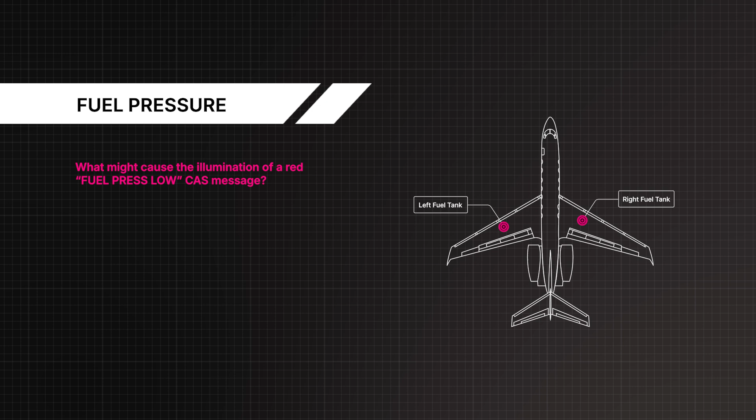Let's begin. What might cause the illumination of a red fuel press low CAS message? Both fuel boost pumps for that engine switched off with the crossflow closed, fuel pressure at the inlet side of the high-pressure fuel pump less than 15 psi, or a fuel leak.

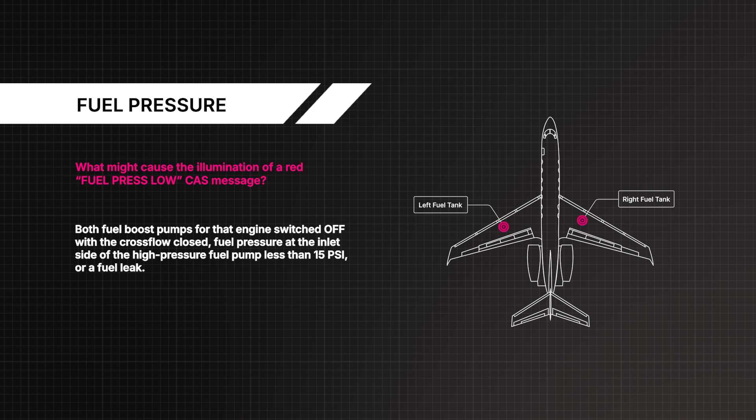How is a fuel imbalance corrected using the crossflow valve? By opening the crossflow valve and turning off the fuel pumps on the light wing.

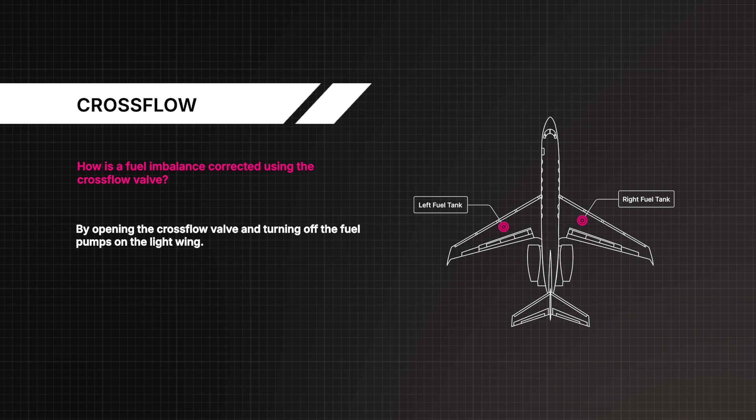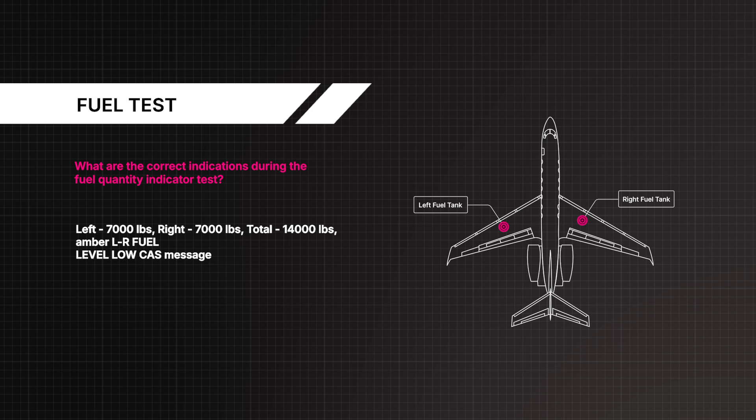What are the correct indications during the fuel quantity indicator test? Left, 7,000 pounds, right, 7,000 pounds, total, 14,000 pounds, amber left and right fuel level low CAS message.

Where is the fuel hopper located? In the inboard portion of each wing tank.

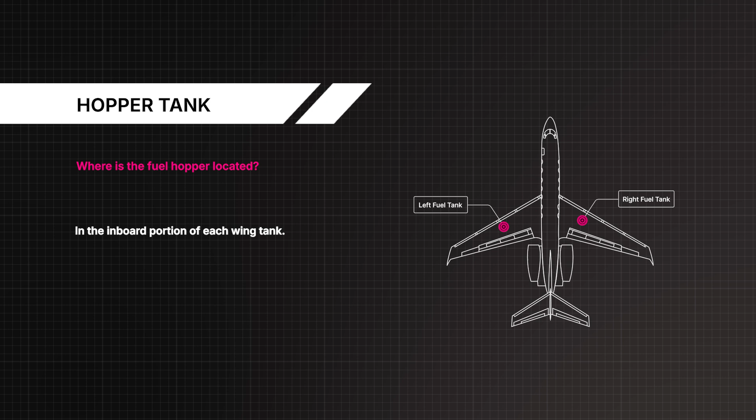Fuel low level warning is provided by low level sensors, which are installed where in the wing? In the fuel hopper tank.

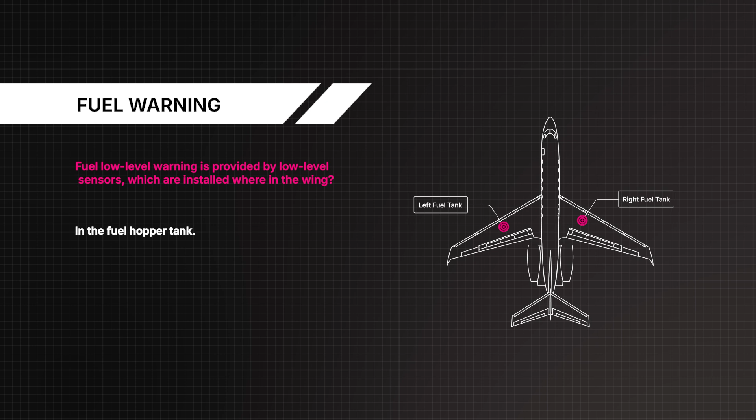Where are the electric fuel boost pumps located? In the main wheel well.

What is the function of the pressure fueling static port located under each wing? It provides a reference pressure to prevent overpressurization of the wing during fueling operations.

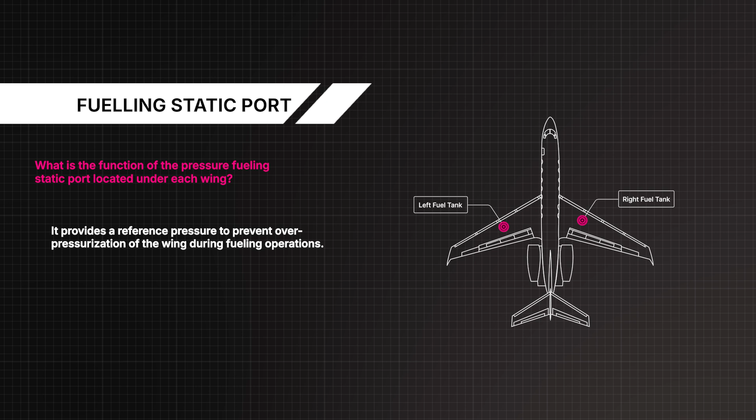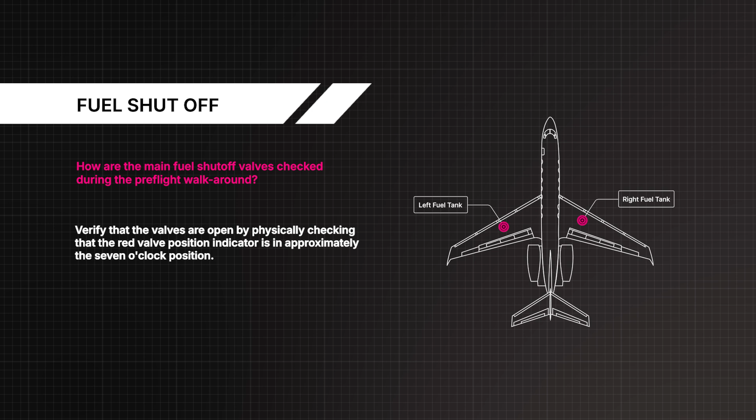How are the main fuel shutoff valves checked during the pre-flight walkaround? Verify that the valves are open by physically checking that the red valve position indicator is in approximately the 7 o'clock position.

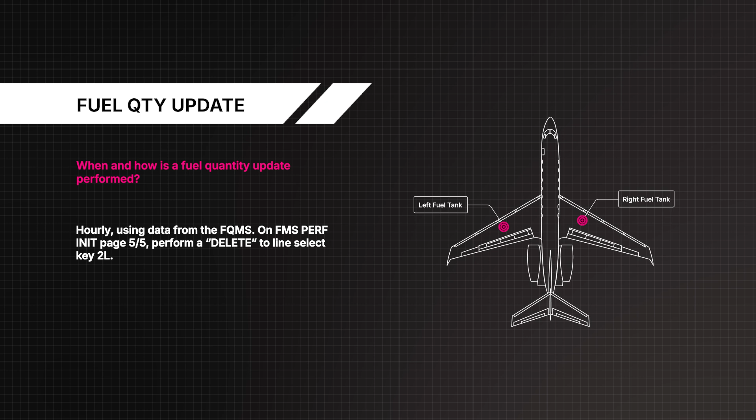When and how is a fuel quantity update performed? Hourly, using data from the FQMS. On FMS Performance Init page 5 of 5, perform a delete to line select key 2 left.

What are the electrical power sources of the fuel boost pumps? Left and right main essential DC bus, left and right alternate right main DC bus.

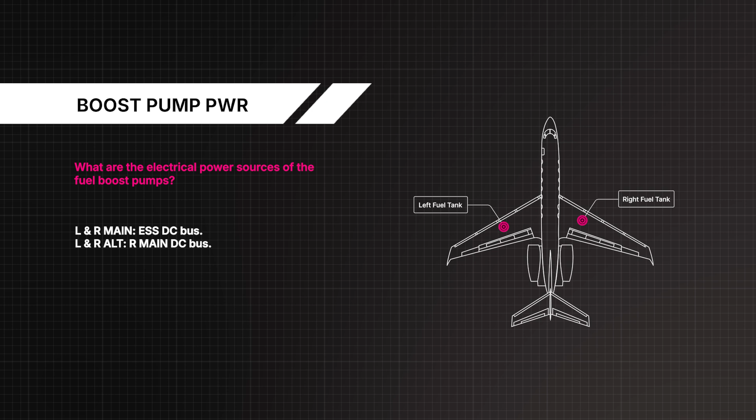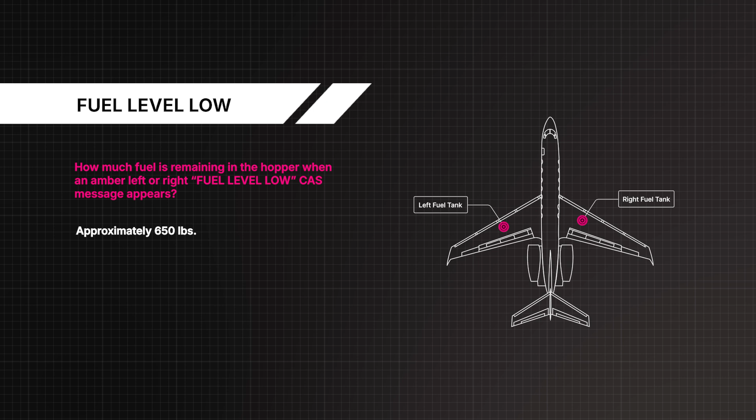How much fuel is remaining in the hopper when an amber left or right fuel level low CAS message appears? Approximately 650 pounds.

What is the capacity of each fuel hopper tank? 190 gallons.

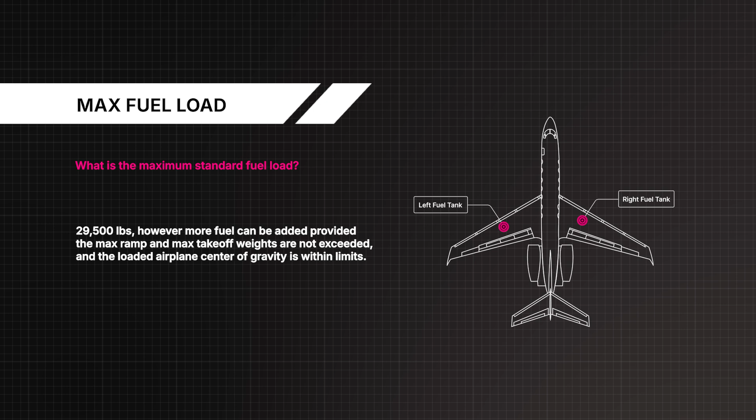What is the maximum standard fuel load? 29,500 pounds. However, more fuel can be added provided the max ramp and max takeoff weights are not exceeded and the loaded airplane centre of gravity is within limits.

What is the maximum fuel imbalance? Varies with aircraft weight. Reference chart in the QRH, section EF.

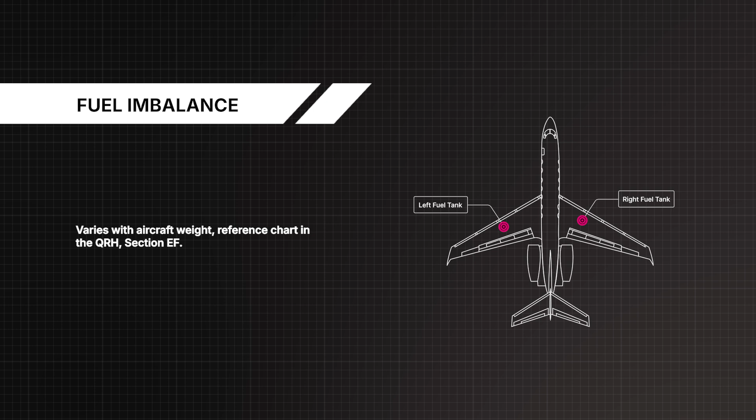If a main fuel boost pump should fail, will the alternate fuel boost pump automatically turn on if selected off? Yes, there is a boost pump auto-change feature.

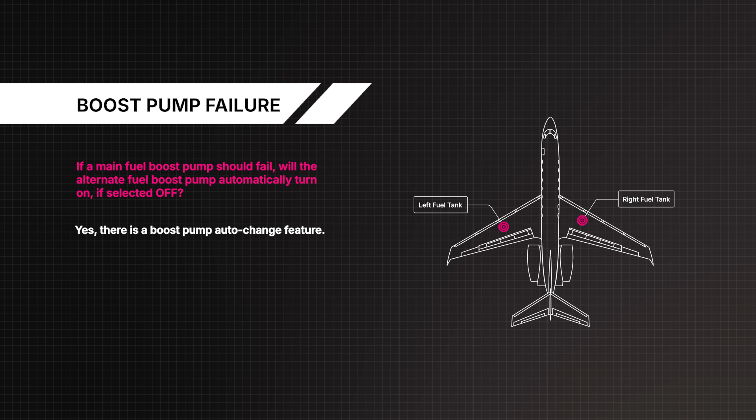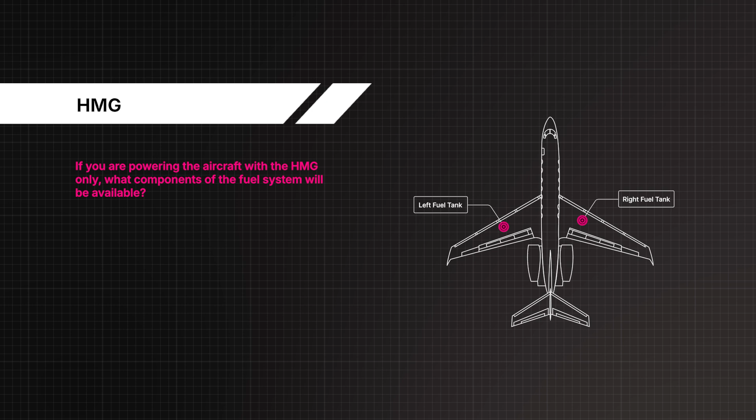If you are powering the aircraft with the HMG only, what components of the fuel system will be available? Left and right main boost pumps, crossflow and intertank valve.

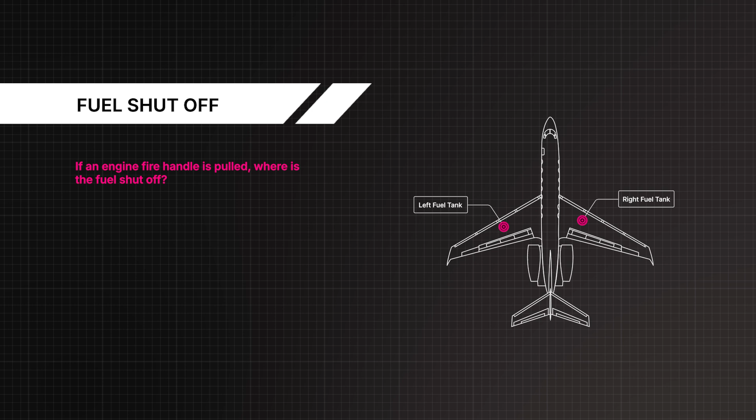If an engine fire handle is pulled, where is the fuel shut off? At the boost pumps in the main wheel well.

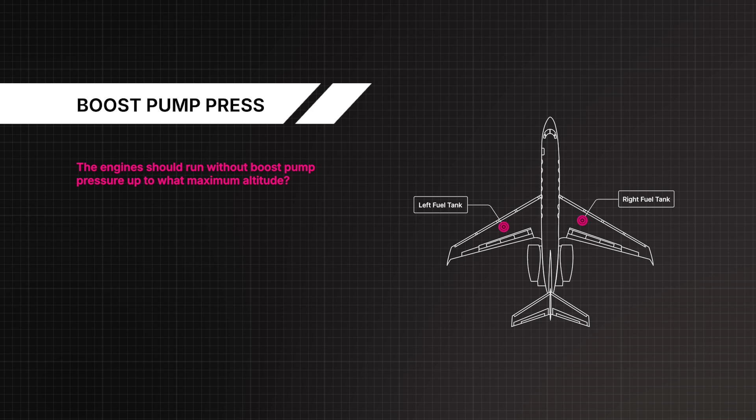The engines should run without boost pump pressure up to what maximum altitude? 20,000 feet. If two boost pumps fail on the same side, how would you keep the fuel balanced? By opening the intertank valve and using a side slip, nose of the airplane toward the heavy wing.

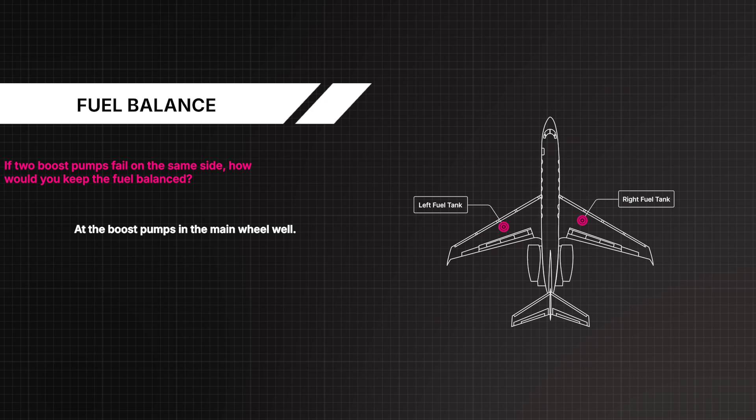How are the hopper tanks kept full? By the use of flapper valves and ejector pumps.

Where can fuel quantity indications be read? On DU Number 3 engine instruments display, on the standby fuel quantity indicator, and on the fuel synoptic page.

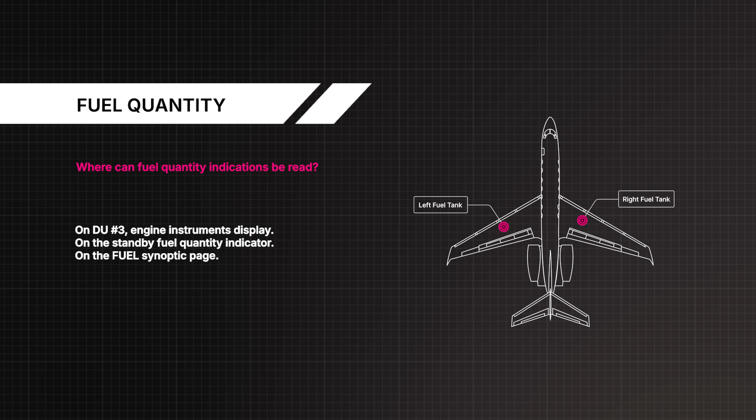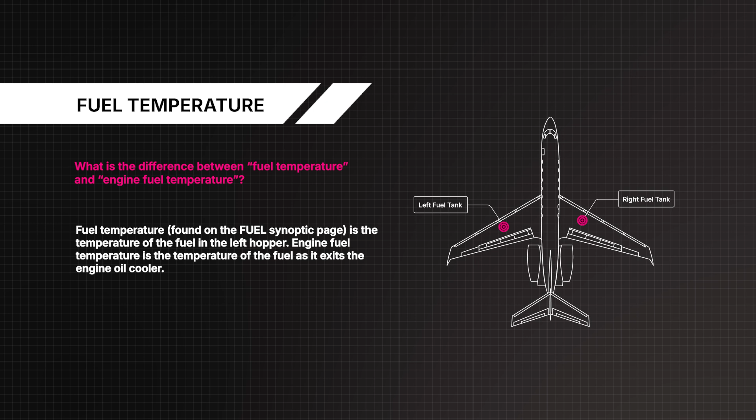What is the difference between fuel temperature and engine fuel temperature? Fuel temperature, found on the fuel synoptic page, is the temperature of the fuel in the left hopper. Engine fuel temperature is the temperature of the fuel as it exits the engine oil cooler.

What does the CB light in each boost pump control switch indicate? The respective circuit breaker on the PDB is tripped.